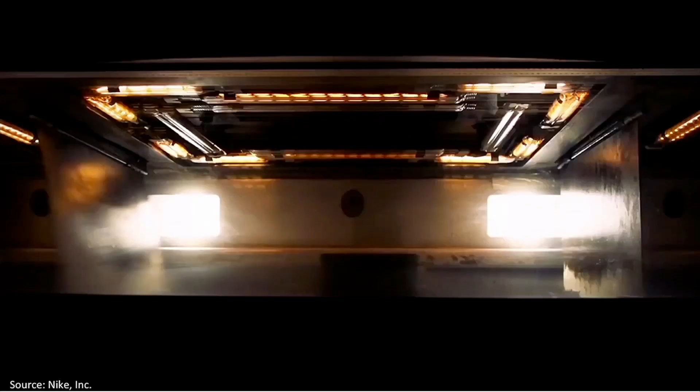So Immelt doesn't want to talk about shoes, but that's all Nike is talking about. And in the case of Nike, they just did all the cleats for the Super Bowl, and they're beginning to roll this into other advanced applications, because for the first time, they can optimize performance to your body. They could begin to register and record and biomimic and amplify and multiplex your personal performance.

What's the big deal about 3D printing at the end of the day? It fundamentally boils down to the fact that with 3D printing, complexity is free, which means that for the first time, you can begin to design for performance and function, and not to the traditional constraints of manufacturing methods, which limited you in all the ways that you could manufacture so that you could mass produce.

I used to think that since complexity is free and there's no penalty for it, we would usher in a completely new era of mass customization, personalization, and stylizing. To a certain extent, that is happening. But what I did not foresee is that it would also usher in a completely new era of mass manufacturing of identical but very complex parts, as GE is doing.

When you look at how big this could become as part of a $70 trillion manufacturing economy, there are really four trends driving adoption here. First, design and manufacturing will be completely reimagined. Second, free complexity will drive enhanced functionality and performance. Third, it will revolutionize personalized surgery and patient-specific medical devices in ways that alter outcomes. And finally, it will usher in a 3D lifestyle in every way.

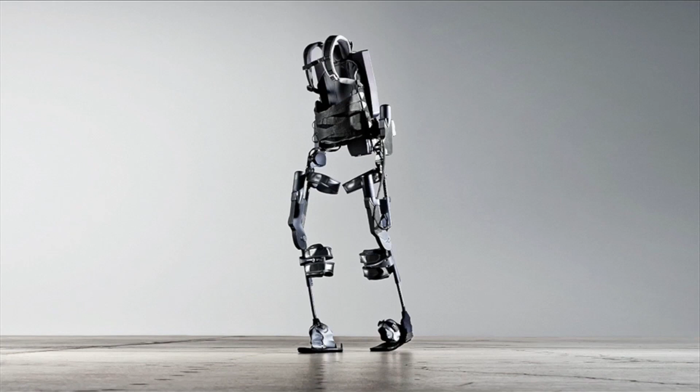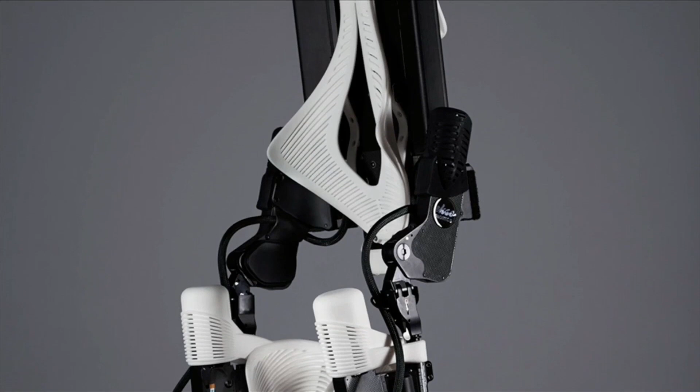The bionic exoskeleton, or wearable robot, has come to represent a true technological biological fusion as the most complicated neuroprosthetic ever imagined. Design engineers from 3D Systems teamed up with Ekso Bionics to create the first hybrid 3D printed exoskeleton.

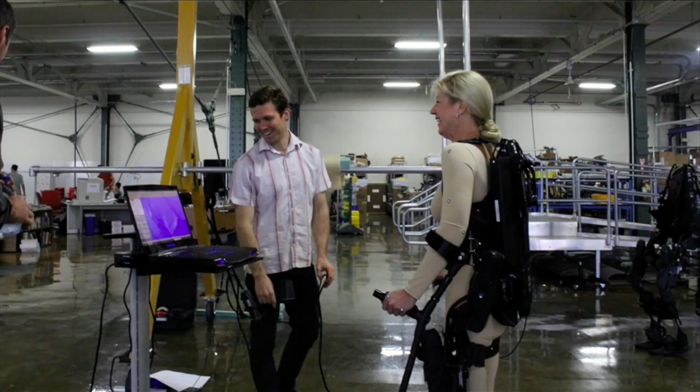I became an integral part of the design process. I was dressed in a skin-colored unitard as the team scanned my body while I was sitting and standing in the robot. These images were then cast onto a computer screen. The goal was to create custom 3D printed parts that connected my body accurately and symbiotically to the robot.

These fixed interstitial parts needed to envelop my legs and torso in exact locations to provide balance and support while carefully avoiding pressure points. The 3D printed parts are strong enough to hold my body in various postures, yet flexible enough to be comfortable. They're ventilated with a complex striated filigree pattern resembling my muscles. These parts allow my skin to breathe, yet the product weight is minimized.

For the first time, I feel as if the exoskeleton is truly one with me. It's as if it's an extension of my body, as though my own DNA has been imprinted into the design itself.

An exoskeleton can become so much more than enabling a person to walk again. It can become an art form of moving sculptured beauty reproduced from a person's own blueprint. A paralyzed man or woman can look forward to being beautiful, standing tall, and walking again in the ultimate fashion statement—a 3D printed exoskeleton that reflects who they are on the inside.

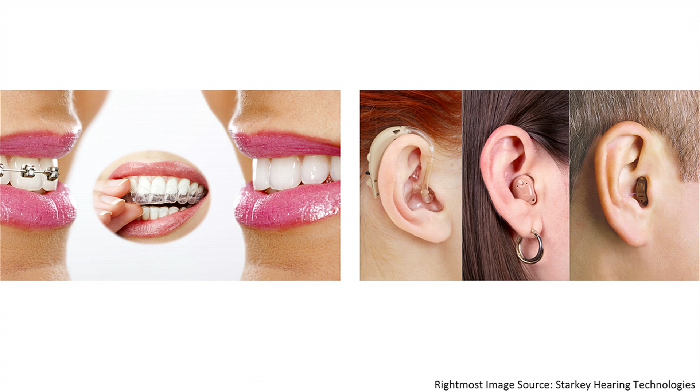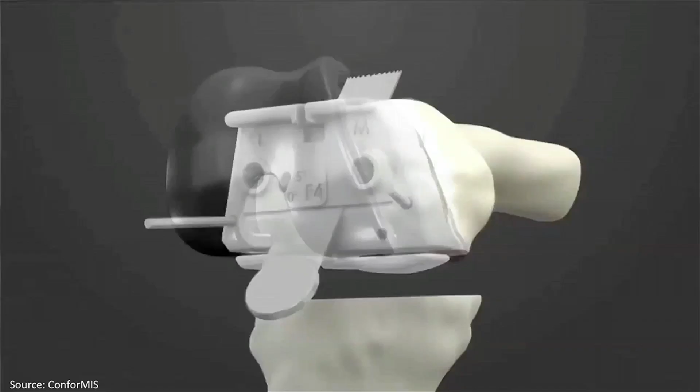But what you don't know is that already today, nearly 20 million Invisalign aligners are manufactured annually using our 3D printers. Every in-the-ear-canal hearing aid device around the world today is 3D printed using biocompatible materials. Increasingly, patient-specific full knee replacements are being 3D printed. And what's even more amazing is that all of the surgical instruments—how it's guided and planned—are made from your data, 3D printed, sterilized, and delivered to the operating room, made for you, eliminating all of the guesswork.

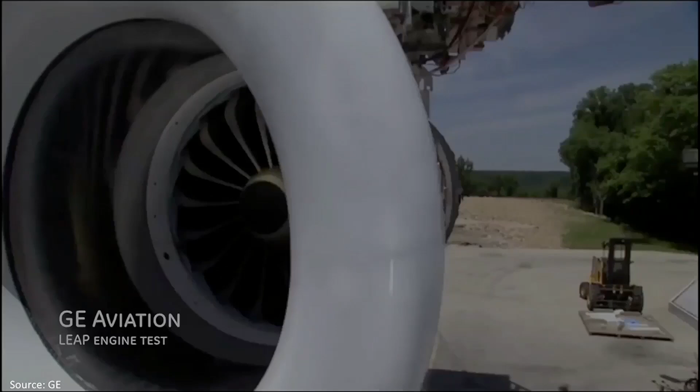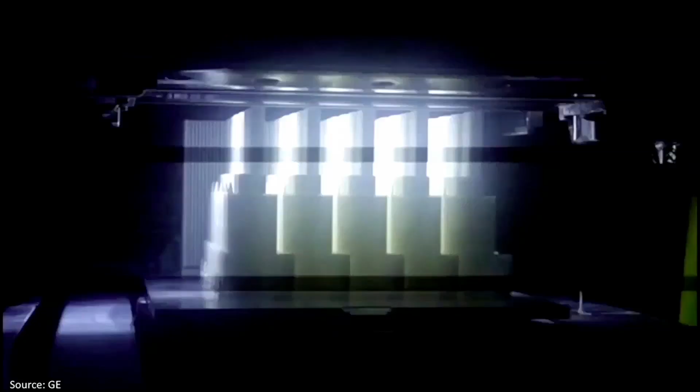Companies like GE are spending billions to save millions of dollars in fuel consumption on their next generation LEAP engine. That's good for GE, good for the environment, and good for the airline industry.

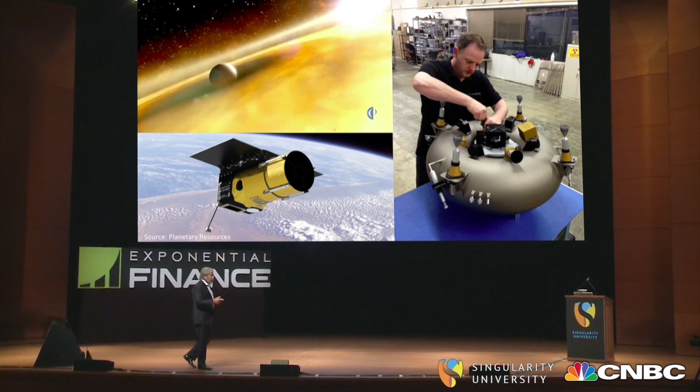But what you don't expect is that startups like Peter's Planetary Resources are also using 3D printers, and they have access to it to make what I call the space drone that is going to go out there and get us resources from near-Earth asteroids. They can do it cheaper than NASA, and faster. It actually shows us the power of democratization—where you expect GE to do it, you may not expect a startup to do it.

Do you think 3D printing will ever be faster than injection molding? Nope.

Will 3D printing ever, in a million years, be faster than good old injection molding? Not a chance. In the last 140 plus years, injection molding has become the process of choice for bulk plastic manufacturing. Even with all the promises of 3D printing, industry observers have asserted that it could never be as fast as injection molding. I'm here at 3D Systems to break the news to them.

3D printing being faster than injection molding, that's definitely fiction.

If you plot out the build speeds of 3D printing over the last 20 to 30 years, what you'll find is that it's continuously got faster. And if it continues in this trend, we're going to see more and more lean, same-day, on-demand manufacturing coming from 3D printers, a true alternative to injection molding.

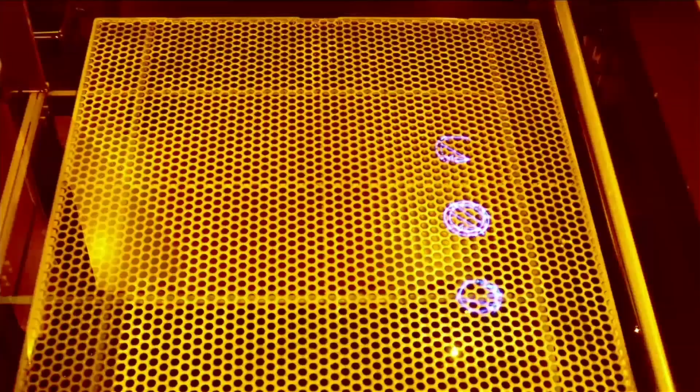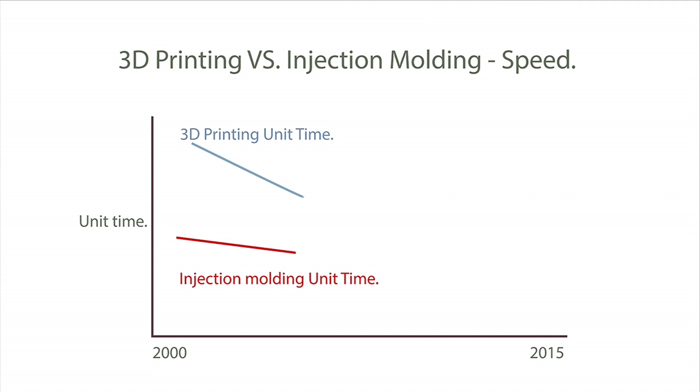Yeah, right. How could that even happen? Lots of R&D, better materials, more powerful lasers, bigger machines. It's more smart work. We're doubling 3D printing capabilities every 18 months. This has been happening for over 10 years, and it continues to do so. Injection molding systems, on the other hand, it's leveling off. It's a mature technology, and it's not getting any faster.

It's some kind of joke. Let me give you an example. We recently printed 2,400 mini lampshades on an SLA machine, and it took about 20 hours. That's 30 seconds per part.

Plus, with 3D printing, you don't have to wait weeks for tooling. You can easily iterate designs. You can be manufacturing faster.

Is this true? 3D printing is that fast? 3D printing is that fast. It's a fact.

So I saw lots of raised hands when Peter asked you how many of you knew about 3D printing. How many of you knew that you could print a part every 30 seconds? Only the two smart guys in the room.

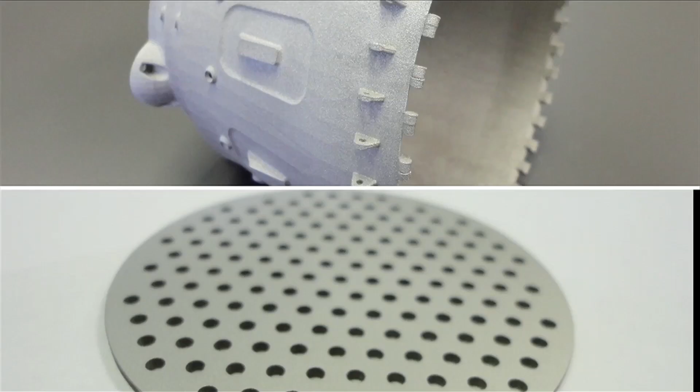So 3D printing technology is advancing very fast. It truly is exponential in every way, and that includes the number of materials, including the ability to print in real ferrous and non-ferrous metal alloys in ways that actually exceed the performance of investment casting parts and CNC machined parts. And this is only the beginning.

That's why I do this. I love my work. I love my craft. I love closing my eyes and seeing where the forms and turns of every ring or cufflink takes me. But I have to make those designs real.

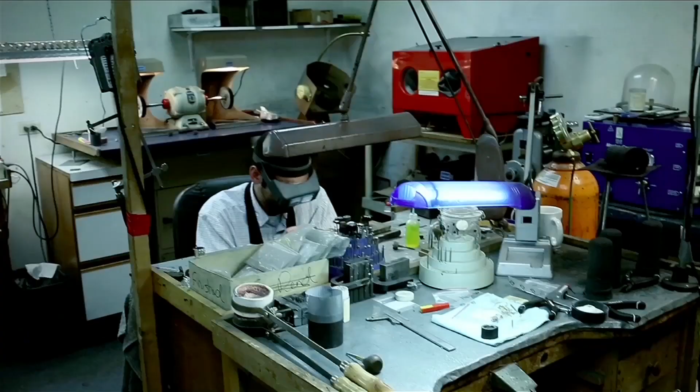That's the business part. And before the ProJet 1200 3D printer, making it real was like making a compromise. It felt like I had to shush my imagination and focus on manufacturing. Now I go into every piece knowing that if I can design it, I can make it, period. Press a few buttons, walk away, and within an hour, I've got a 3D printed casting pattern that matches my design perfectly.

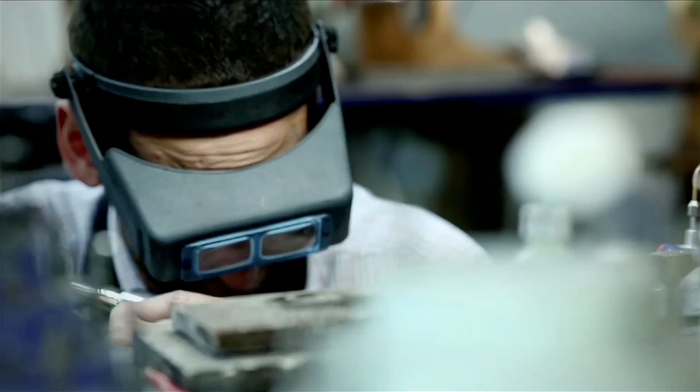I can go straight into casting. It sounds easy because it is, and at a price that I can manage. That's how my creative...

So desktop manufacturing is becoming a reality. For under $5,000 now, you can print your wax-ups, and you can go to precious metal casting as a jeweler. Same for the dental industry. Desktop manufacturing is a reality.

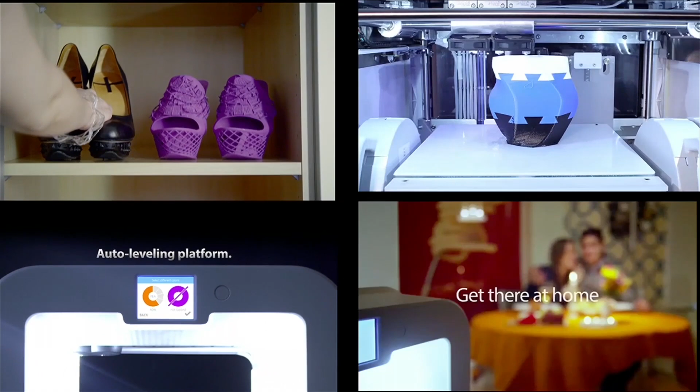And I am absolutely passionate about making sure that the 3D lifestyle happens. And in my mind, there is no question of whether or not we will have a 3D printer in every home. The right question to ask is, what room in your house will your 3D printer reside?

Is it going to be in your wardrobe because you will accessorize what you're going to wear with your evening attire? Is it going to be in the kitchen because you will be printing personalized nutrition? Is it going to be in your man cave, maybe, if you want to pursue your hobbies? That's the way that I'm looking at it.

And you can see that this is going to be complemented with ubiquitous physical photography devices. The techies call it 3D scanning. I call it physical photography. And we already have devices like this on the market for under $400 that will completely digitize you and replicate you.

The same tools will become perceptual design tools that allow us, for the first time, to communicate and create designs by looking at gestures, haptic force feedback, and facial expressions, in the same way I'm communicating and making eye contact with you. That's another way we're going to mainstream this technology to the other 99% who aren't going to become CAD users and coders anytime soon. That technology is real, and it's being commercialized as we speak.

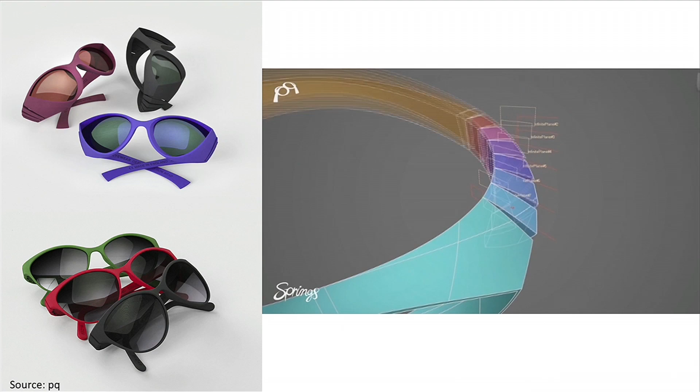These kinds of capabilities are coming to market because of the digital thread that connects all these technologies, and it's going to increasingly become faster. Those who produce high-quality, personalized products at breakneck speed win.

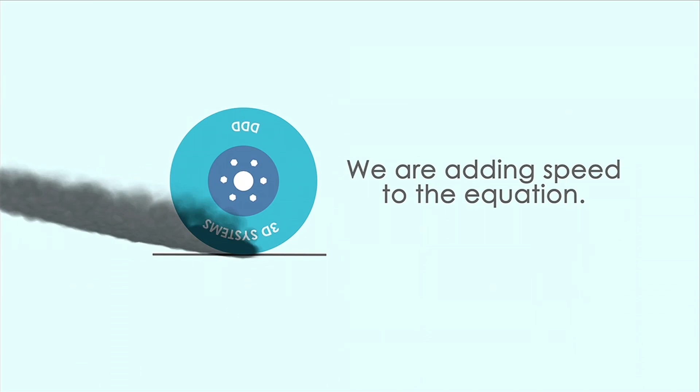3D printing has already begun to fulfill this promise with its ability to produce customized, complex, end-use products. Now with 3D Systems, we're adding speed to the equation, putting 3D printing on the fastest track yet. This paradigm-shifting, continuous, high-speed fab-grade printer will make true automated, low-touch additive manufacturing a reality. To ramp up speeds for production-level volume, we've broken away from the methods of contemporary 3D printers, which typically use a movable print head or laser creating layers on a stationary print bed. We've instead created a true assembly line by making the print bed mobile and the print head stationary, all in a speedy racetrack design.

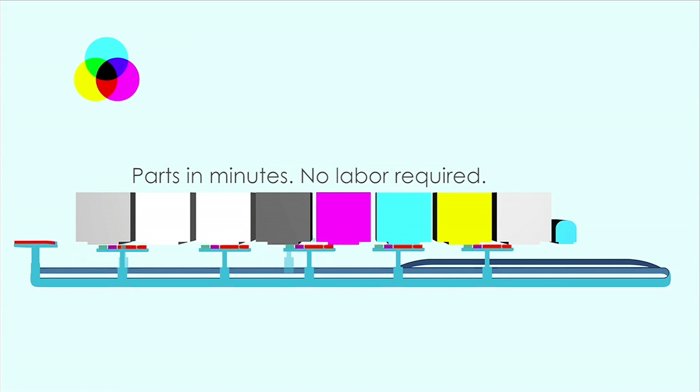Production volume capabilities of this magnitude coincide perfectly with Project Ara, Google's initiative to create an open hardware modular cell phone. Project Ara makes the cell phone a pure personal expression, but to see it through they need the capability to create thousands of unique module shells every day. This is round-the-clock, customized, complex part production at its finest — parts in minutes, no labor required. Highly scalable, the Project Ara engine's first prototypes and test beds are coming to life as we speak. But this capability goes far beyond cell phones — this is the road to high-speed custom manufacturing, and it's even closer than you think.

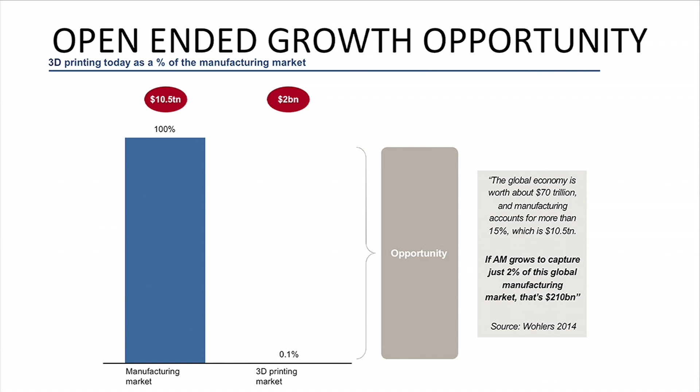A few minutes ago, I told you we can print parts at a rate of one every 30 seconds. Our partnership with Google to help manufacture the Ara block phone will advance that by 50 times — a 50x improvement in speed, and the first-ever continuous 3D printing assembly line that will print in multi-materials, vibrant colors, and conductive layers. Think about the possibilities when you create composites that also have conductive layers and intelligence, and where that takes us in terms of further functionality. And think about what happens to that $10.5 trillion manufacturing industry, even if we can just grab 1 or 2 percentage points and begin to disrupt it.

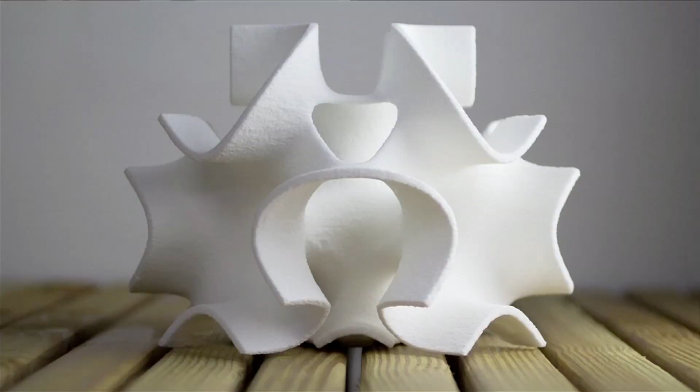Welcome to the Sugar Lab. The Sugar Lab is 3D Systems' digital bakery that uses 3D printing technology to print with sugar.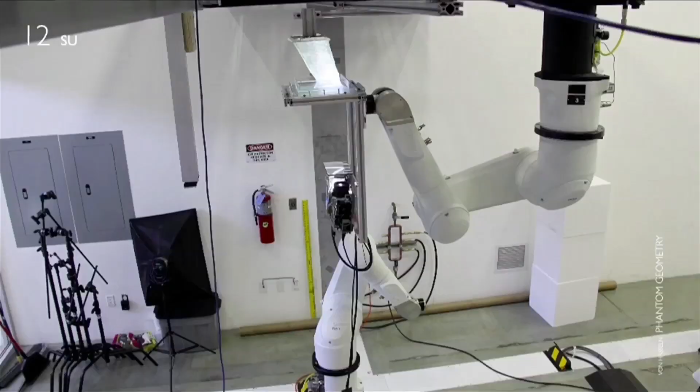I'm Liz. I'm Kyle. We both have a background in architecture. We bought our first 3D printer during grad school. Then one day we printed a sugar tiara for a friend's birthday cupcake, and she loved it so much that it really got us thinking maybe this could be a whole new territory for 3D printing. So we kept experimenting with sugar.

We deliver to people in LA who can order online. In 2013, we became a part of 3D Systems. We started testing out new recipes and creating more elaborate shapes.

But sometimes nature inspires the best designs. So instead of modeling a 3D design from scratch, we can actually use the Intel RealSense 3D camera on our 2-in-1 to capture the geometry we want in 3D.

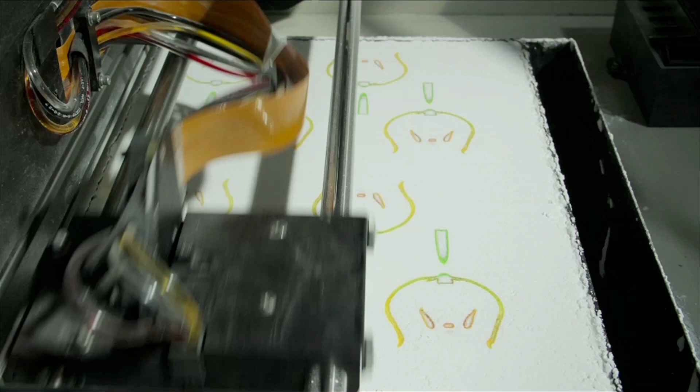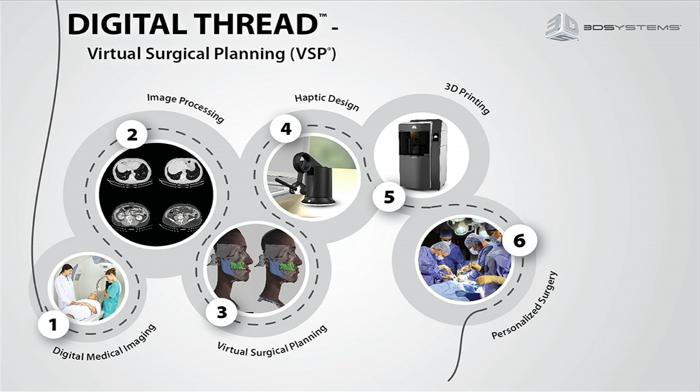I love that any idea we have can be made into a reality. The technology is ready. So when we speak about making it ubiquitous through partnerships like the one we have with Intel, we're basically democratizing the ability to create content and allowing people to replicate, enhance, personalize and stylize. And all of that comes with what I call the digital thread, which is the pipe that connects us from ideas to physical matters, from virtual to actual in ways that are relevant and concrete.

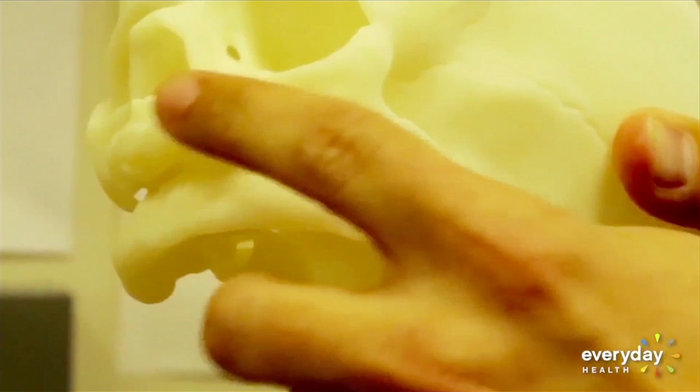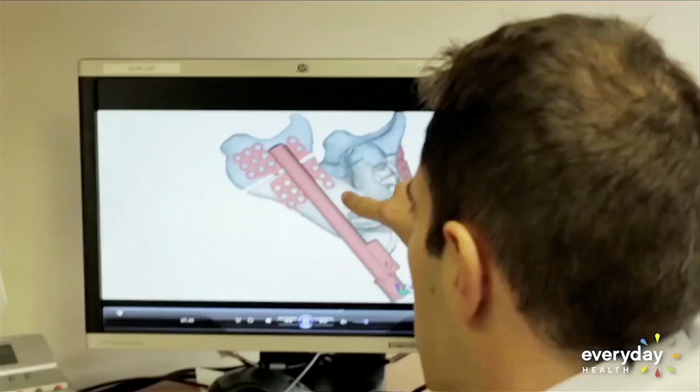But J-Lo was spared that thanks to a new technique which allows surgeons to plan a difficult surgery ahead of time on a 3D model instead of the patient. The advantage of 3D technology is that you can actually do surgery before you get to the operating room. So it not only allows you to plan the surgery, but pick up any problems that might happen during surgery that you want to avoid.

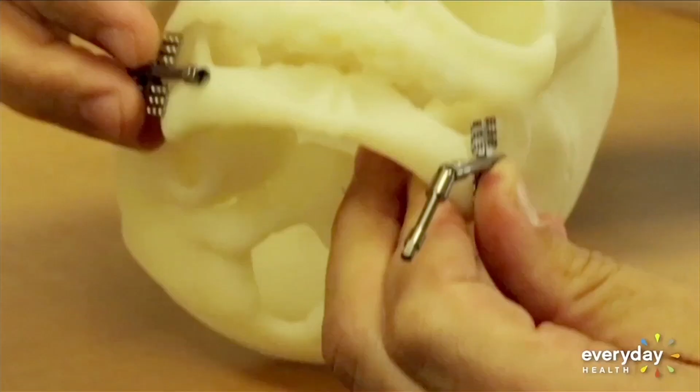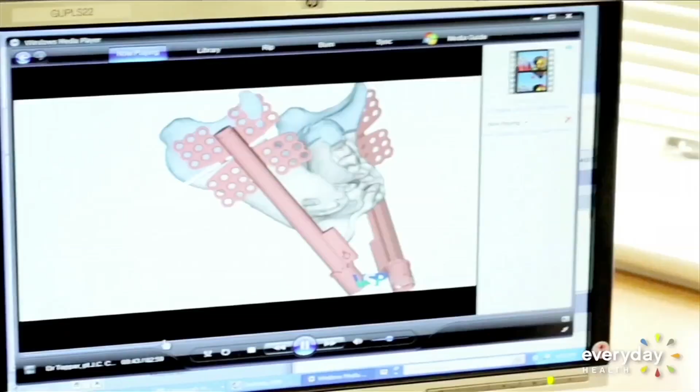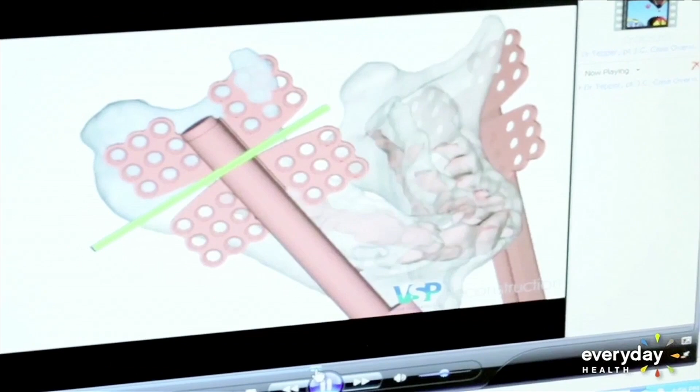Often with complex facial trauma patients, bones have shifted so much that doctors don't have typical landmarks and reference points during surgery. They're essentially making decisions based on guesses, which means lots of trial and error. During a virtual surgery, doctors make all their mistakes on the model, planning the surgery step by step before they ever make an incision. What you're seeing here are the early tooth buds, as well as the nerve running through the bone, which supplies sensation to the chin and the lower lip, and we certainly want to preserve those structures.

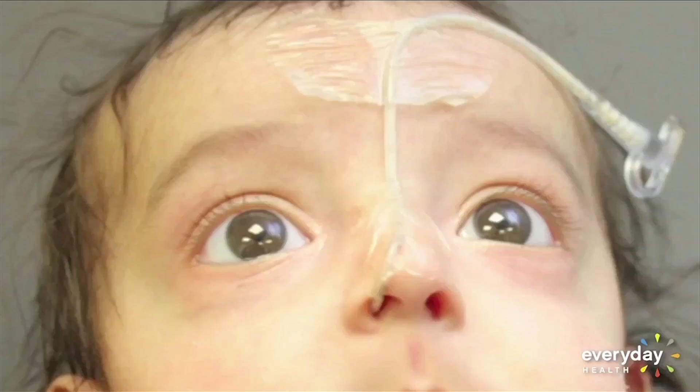And in one shot, the surgery was a success. She had all this energy. A week after the surgery, she was still intubated, but she was more aware. Then, twice a day for one month, Dr. Tepper and his team would tighten J-Lo's screws just a little bit. All of this is under the skin, and with one turn of the screwdriver, it advances one millimeter. Here you can see those pieces begin to advance.

They said that she might feel uncomfortable, but she didn't fuss or anything. Instead of two or possibly even three invasive surgeries on a baby barely one month old, Dr. Tepper was able to fit the device to J-Lo's jaw during his first attempt. Less cutting meant less pain for J-Lo and a faster recovery. Within three months, the device was removed, and J-Lo could finally start using that smile. She's doing great, I didn't think she was going to be the way she is. She's so hyper, she's into everything.

So 3D printing is going to change everything. It's one of those crazy ideas that, as Peter often says, five minutes before it becomes ubiquitous, it's crazy, and five minutes afterwards, nobody knows how we could have ever lived without it. It's changing everything. Last year alone, we delivered over 10,000 VSP procedures in a variety of head and neck operations, and each one, without fail, was completely successful.